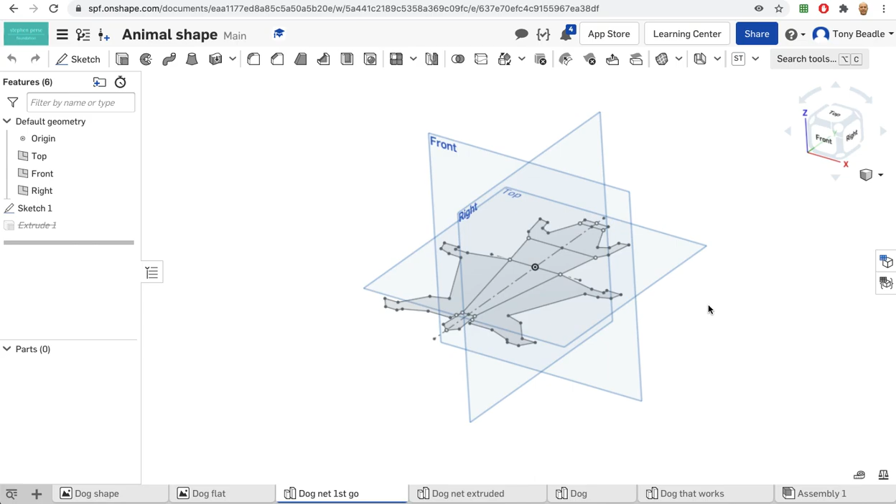Now, you can do this in Onshape, but it is complicated to do. But let's see how this goes. So my story was that I started off by having a go at drawing the actual net itself flat, and I thought, okay, I can extrude that and then see if I can get it to fold. So I drew the shape out roughly, extruded it to 1mm, and tried to put it into the sheet metal tool. But the problem is it doesn't know where the fold lines are, it doesn't see those to work with it.

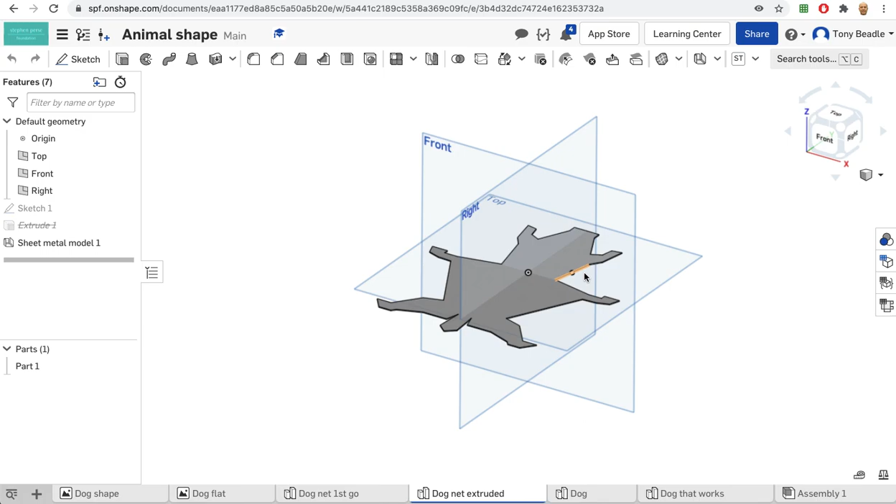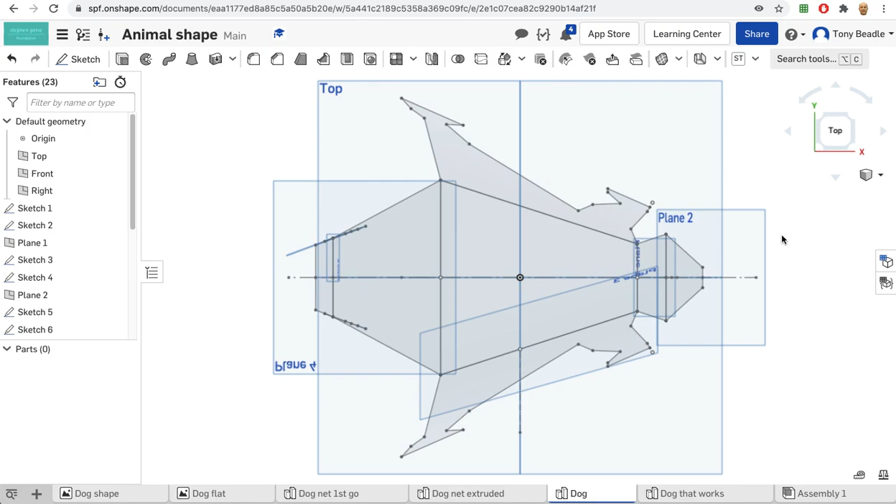So what I realized was that I needed to actually draw the shape out in 3D first. That becomes quite complicated because you have to use lots of work planes to draw each of the parts. Did manage to do it, but it was quite a complicated shape. If you look from above, you can see it has a mirror line running through the middle, so I did half of the shape and then mirrored it to the other half so the features came through that way. Some of my work planes are angled to give me the shape of various parts I want to work with, and that's quite easy to do.

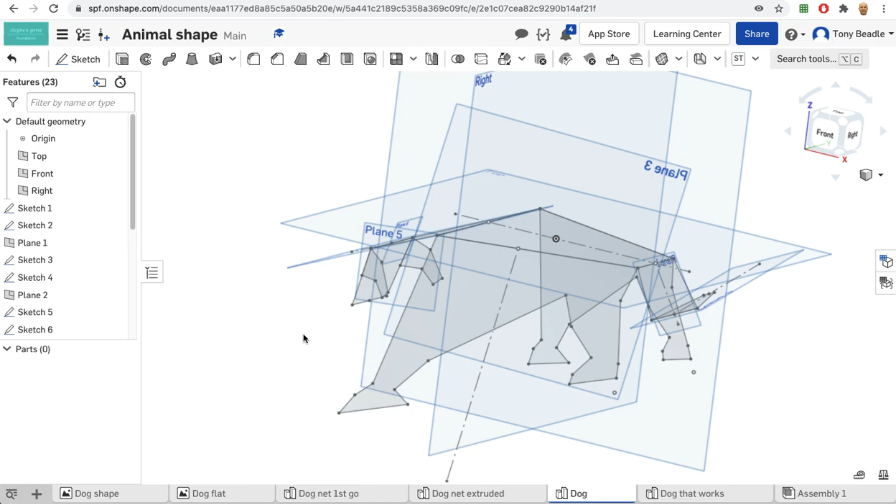The next thing was, how do I put that into the sheet metal tool? Because what it tended to do was extrude each of these parts or thicken them, but not give me a fold line to work with. Then I realized what I needed to do was actually fill each of these areas to create surfaces. So instead of creating a part, I create a surface which can then work for it.

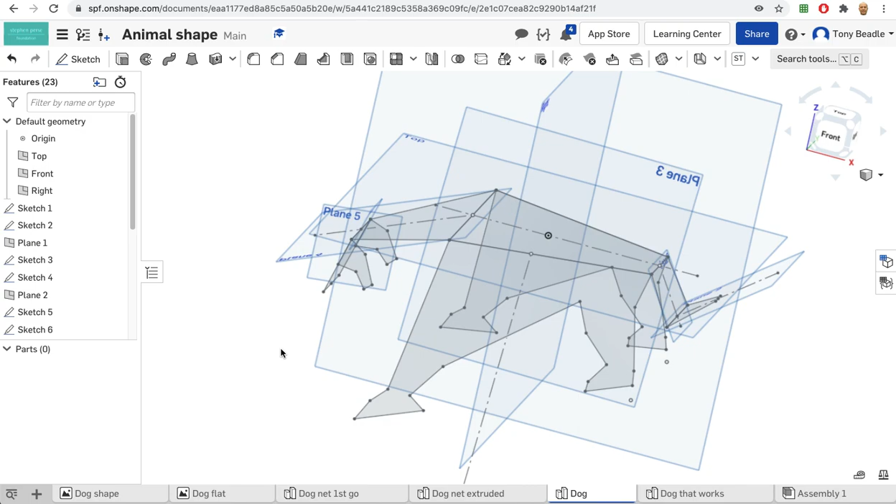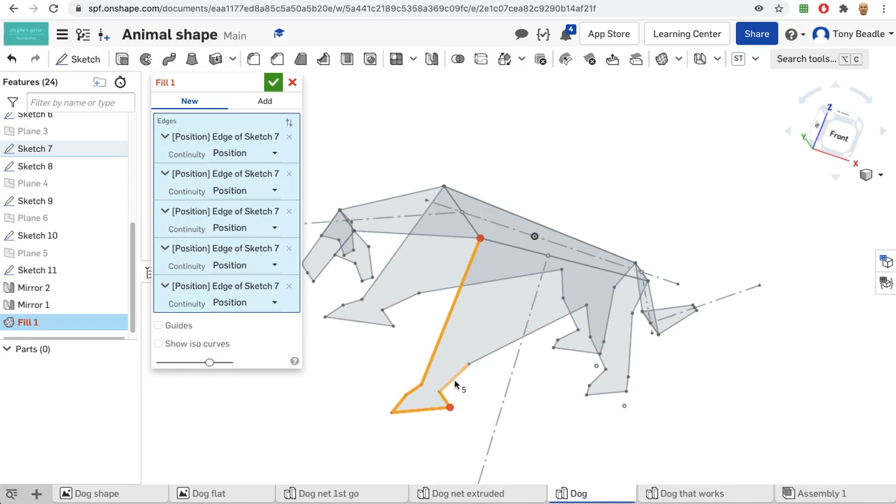Okay, so to do that, I've got all my shapes created here. I'm going to use my fill tool to create each of the parts. So basically take the fill tool, and then select each of the edges of each of the shapes. But you have to do it as a panel, so you have to be careful that you select the right lines as you go through, and they have to be done in the right order for it to work. I'm being very careful about which lines I select. Now that is treated as a surface it creates using the edges of each of those panels.

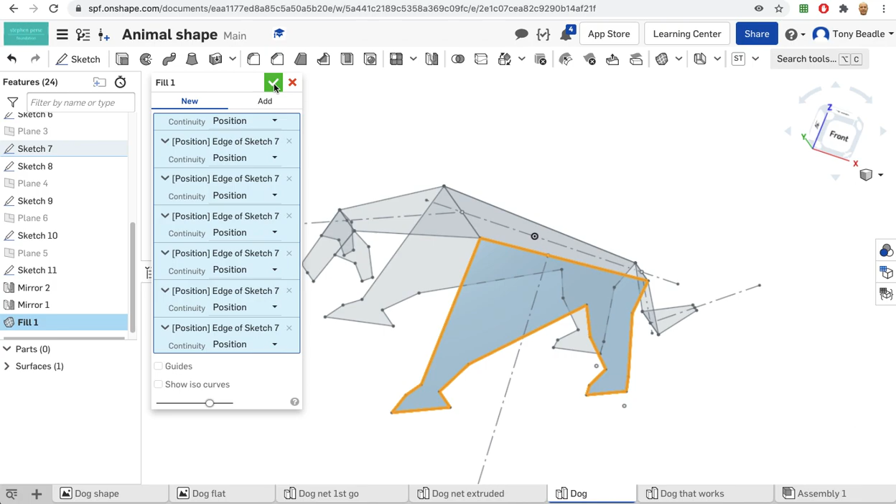What you can't do is do more than one surface, because the fill is on one flat surface as it creates it. That's quite nice, gives me a nice shape to work with. The problem is that when you green tick this, if it's an isolated shape, it can remove a panel, so you just have to be careful about how you go through that fill process.

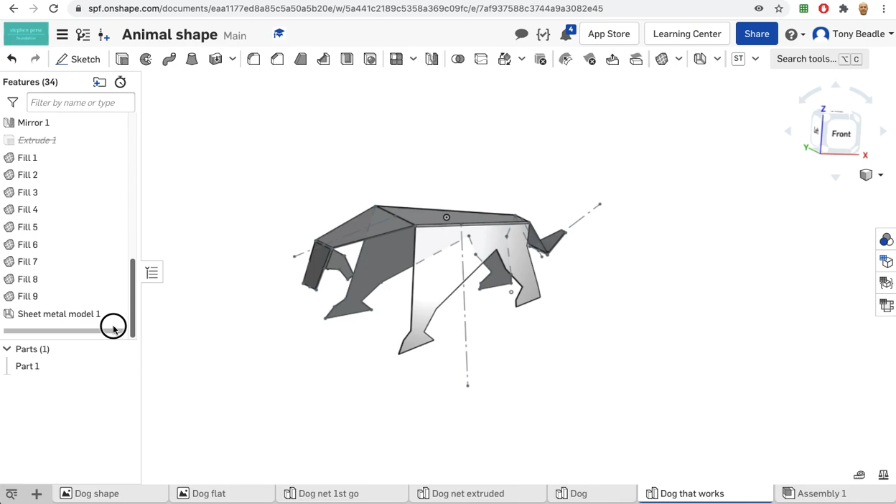What I'm going to do is just build up a list of all the fills as they go through there. Okay, once I've done that, I should then end up with... let me just suppress this for a moment... I should end up with all of my fills created like so. So they are all now filled flat shapes.

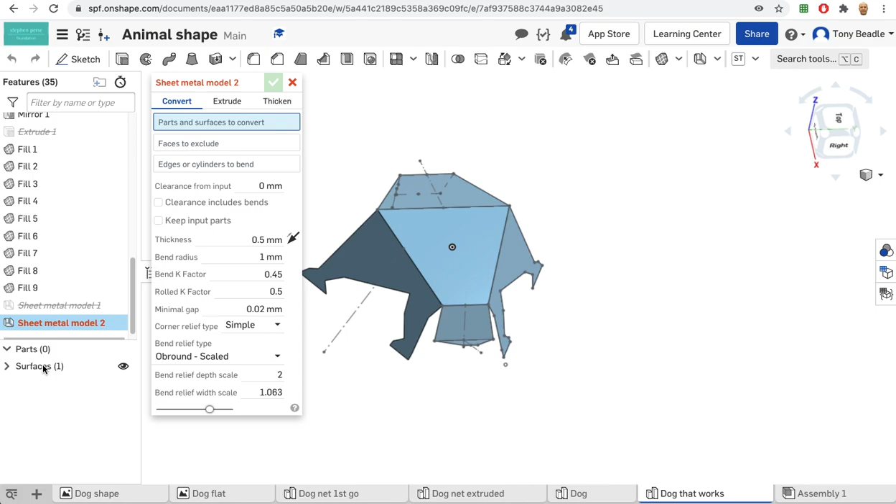Now I can go to my sheet metal tool and ask it to convert which parts I want to use. In this case, it's going to be the surface that I've created here. So I'm going to select that surface, and that has now brought that all in as one piece of material, by using the flat surfaces to work with. I've also set my thickness to 0.5 mil for this, and my bend radius to 1 mil.

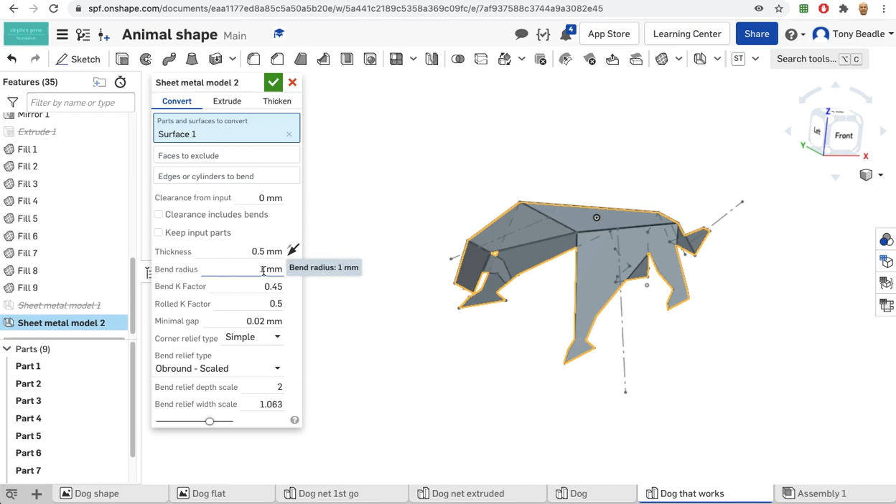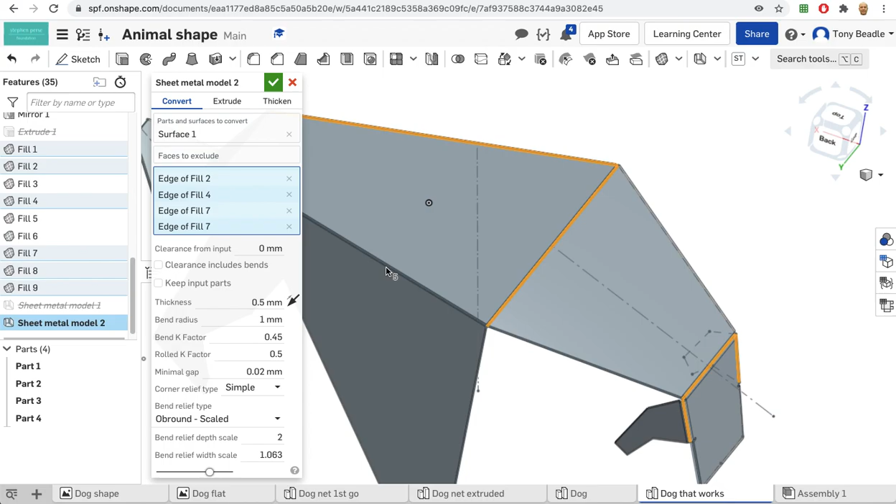Now I can use my edge tool to select which edges I want to actually fold, and that should start to create the folds for each of the panels as if they were actually folded on a sheet metal folder. You can see those beginning to come through there. So then I can select this edge, and this edge, and this edge. And then green tick that.

Now, the proof of the pudding is that if the net has worked, then if I click on my sheet metal table flat view, it should give me the complete net drawn out, separated, with all the folds on it. If it hasn't worked, you will see these as separate parts, and this is what I want. I want the whole thing laid out like so, so then I've got my complete shape to work with.

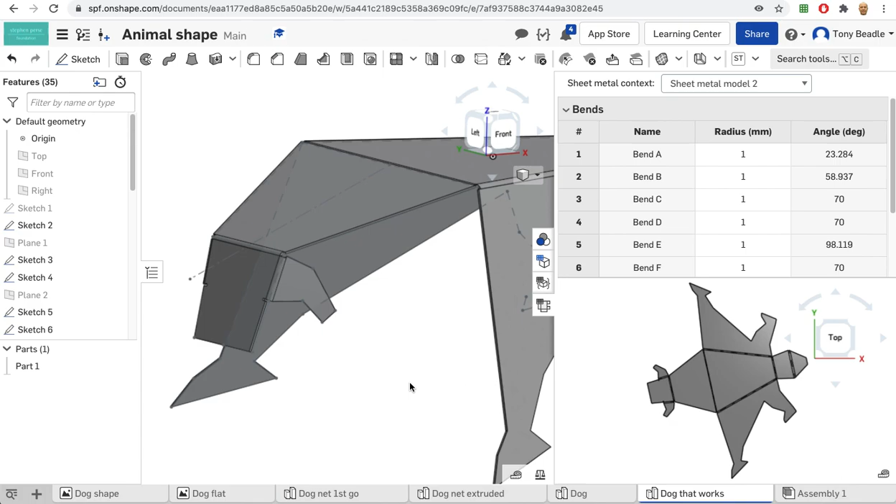This is quite cool to actually use the sheet metal area to work with that. Quite pleased with that. And it does look like the original, apart from a little bit at the tail, I think I missed off a little bit here. But you can see it has actually produced the figure that I want, that could then be folded on the sheet metal or cut out of acrylic, laser cut, and put through that way.